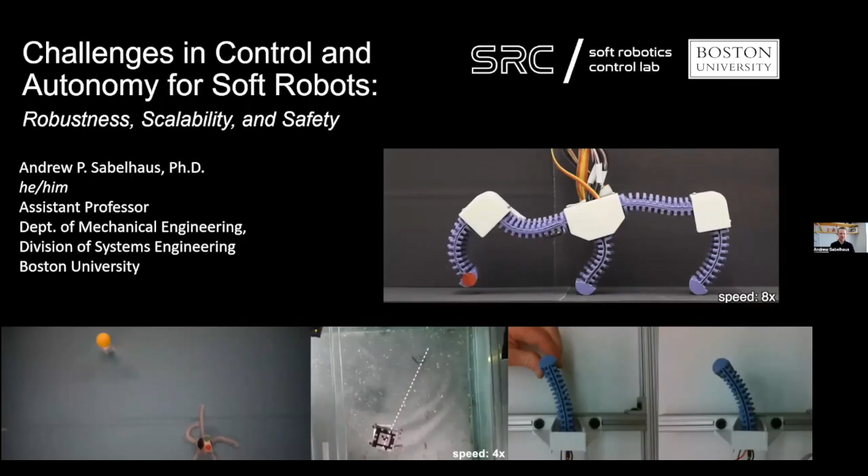Okay wonderful, so thank you all for having me today. I am really excited not just to be here as part of Embodied Intelligence 2023, but also to be in this particular session. I'm really excited to be, in a sense, among other folks who are thinking about control systems and autonomy. I'm a control systems engineer, sort of joining the soft robotics conversation here. What I'm hoping to bring to this today is a larger perspective on the question of what we would like to do when trying to integrate control and autonomy into soft robots. I'll bring three different possible directions here based on the work that I was doing as a postdoc and with my new group at Boston University, thinking about robustness, scalability, and safety.

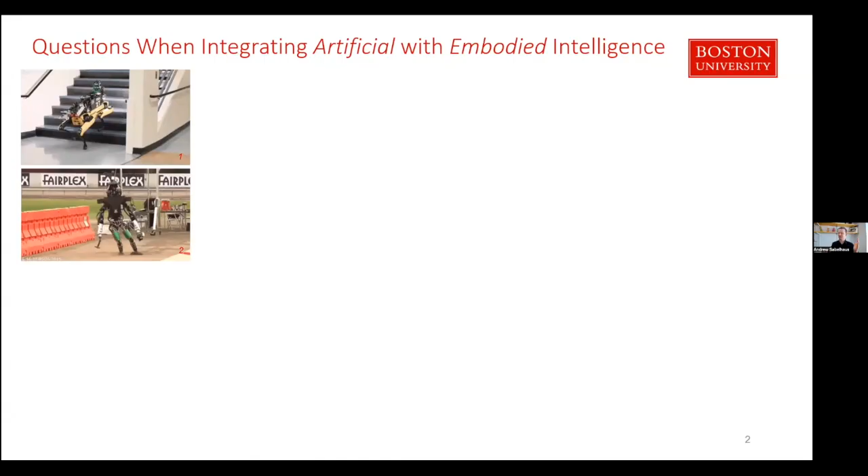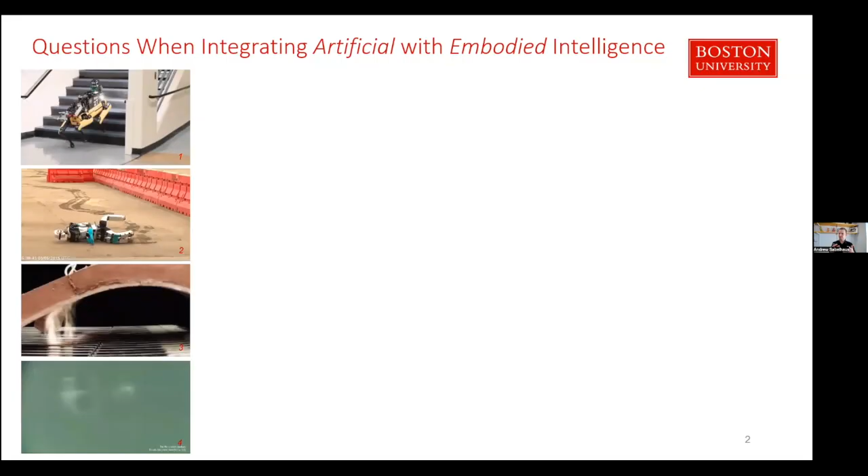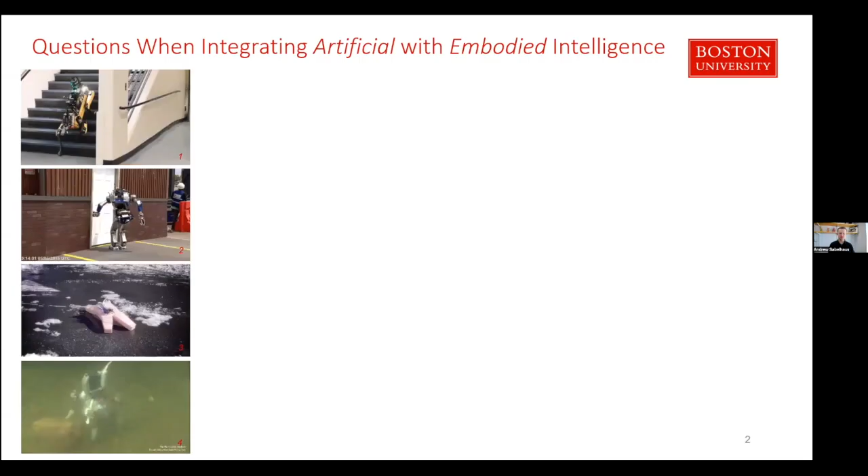So the higher level vision here is the conversation about integrating some amount of artificial intelligence with embodied intelligence. Please excuse the DARPA Robotics Challenge video. It's not here to illustrate the usual conversation about why we would need embodied intelligence, but more to contrast with oftentimes what we're looking at with the types of devices that we build that are softer, that have that sense of embodied intelligence. To illustrate this gap, right? Maybe why we would need to bring back in some of the artificial when we focused on the embodied. Oftentimes the motions of these devices, while very impressive with respect to the environmental interactions, are much simpler, right? You could imagine maybe if these rigid robots were successful, the types of motions they could perform are much richer. So there's a big gap here.

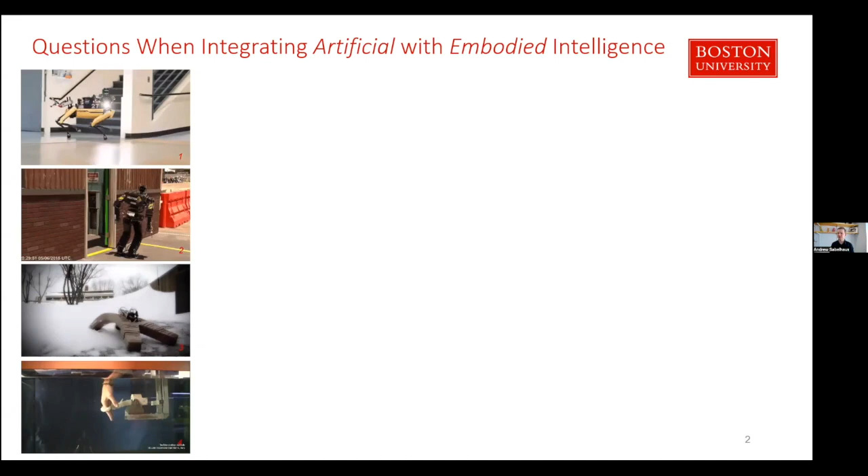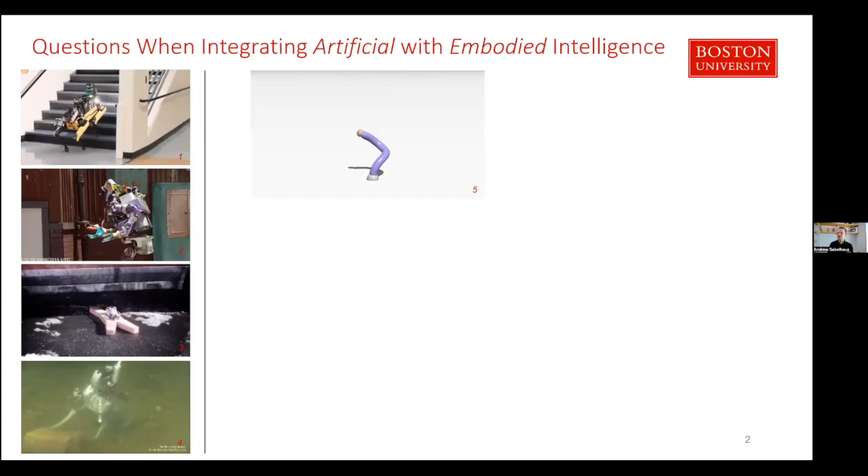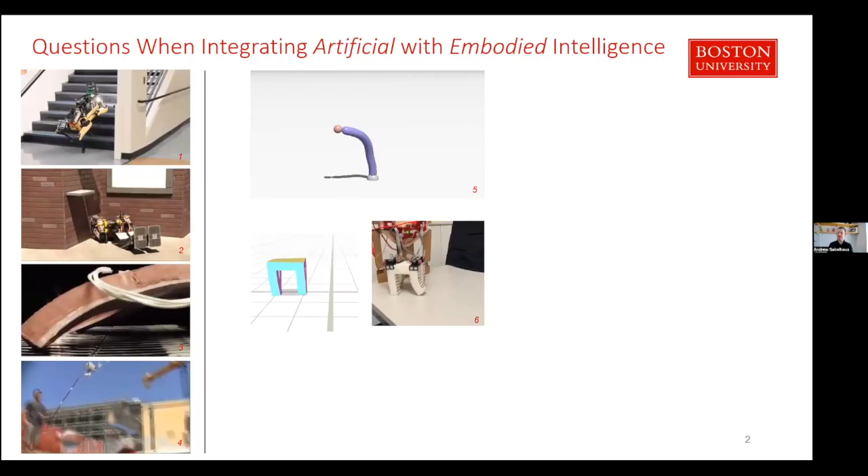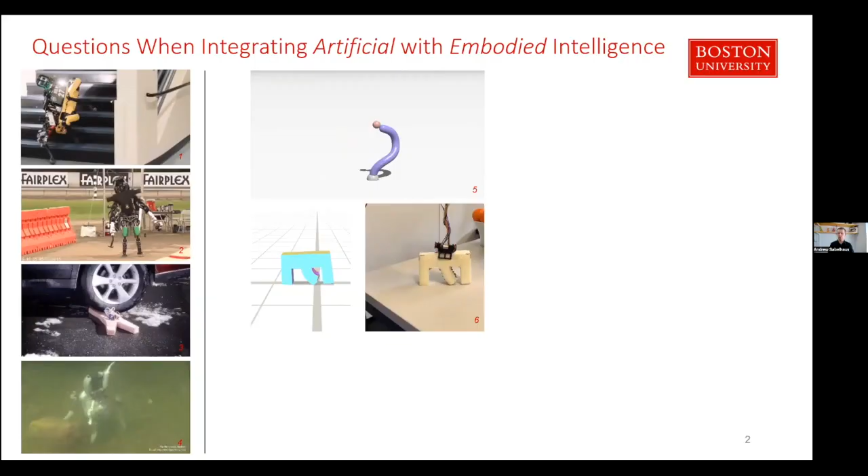And folks in recent years, very recent years, have been thinking a lot about how to bridge this gap, oftentimes applying traditional perspectives for traditional types of goals for what we might call controlling a soft robot, whether this is reinforcement learning or things like generating trajectories. We're thinking a lot about positioning of the robot's body in space. Oftentimes this comes with limitations with things like computation and implementing these in real time. So the results are either limited to simulation only, or pre-calculate a set of inputs, click go, and then let the embodied intelligence take over. So there's a question about whether or not that temporal separation of artificial and embodied is really going to be optimal for what we would need to bridge that earlier gap.

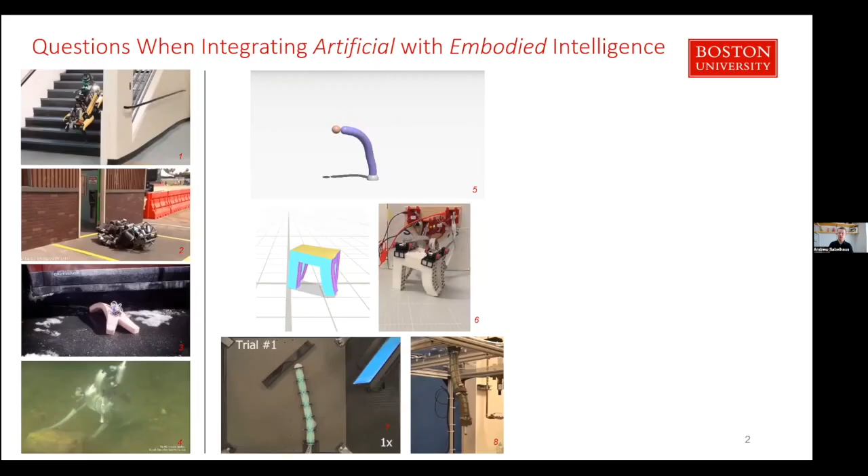And the times in which we have gone and been able to do real feedback, closed loop in real time for soft robot manipulators in particular, the environment has still been relatively simple, like well known, and matches our model pretty well, which raises the question of will that technique be transferable to the unstructured environments we're most interested in?

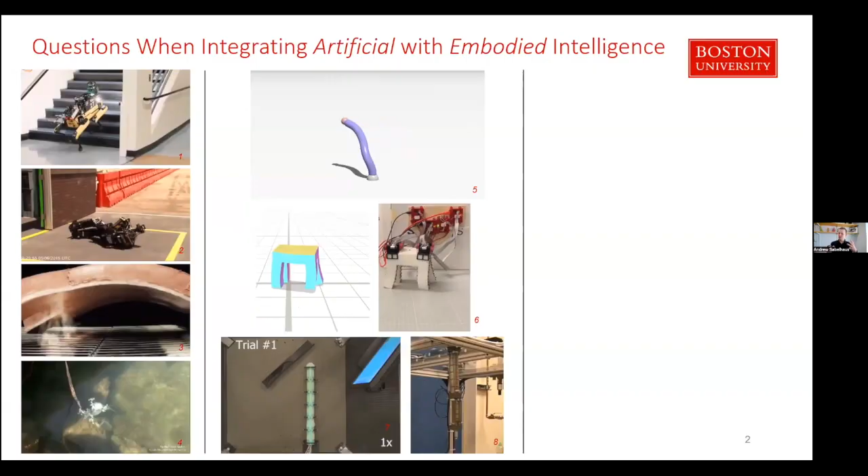And a big perspective here that I always like to think about with this conversation is a point that one of our colleagues made very eloquently just a few years back, in a mathematical sense: with a goal of good tracking performance, right, having a robot move into a particular pose, we end up reducing the compliance of the robot sort of by default. So there's a question of, if we were thinking about a traditional control goal, the tools that we have in our toolbox of having a system track a trajectory perfectly, the right solution in a sense is going to be something that's rigid.

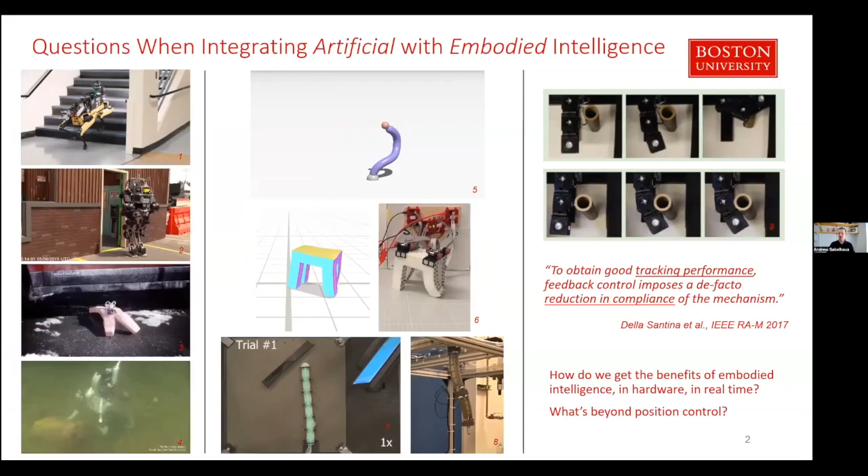So if we're talking about systems that are no longer rigid, is perfect tracking really going to be our goal? What does a control goal and a goal for autonomy look like that respects embodied intelligence, that brings it into hardware, that can happen in real time? And in particular, is there something beyond just positioning of a soft body in space?

I think there are three possible options as part of this larger conversation. I'm very interested in what you all are thinking about here too, especially other folks in control who are thinking about adapting our toolbox of techniques.

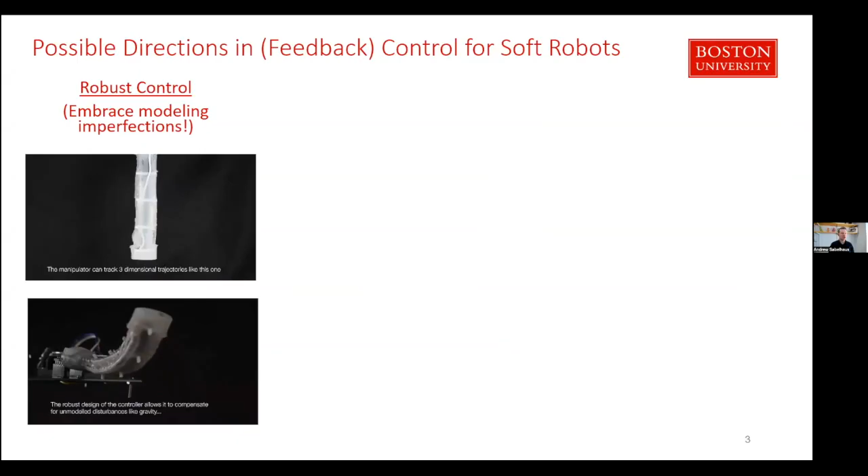So the first one is robustness. This is something that Professor Mitra made an excellent justification for earlier, where we could think about if our models are imperfect, if we're simplifying our models, can we instead design controllers that accept that those models are imperfect and still have properties like maybe stability, something we're comfortable talking about?

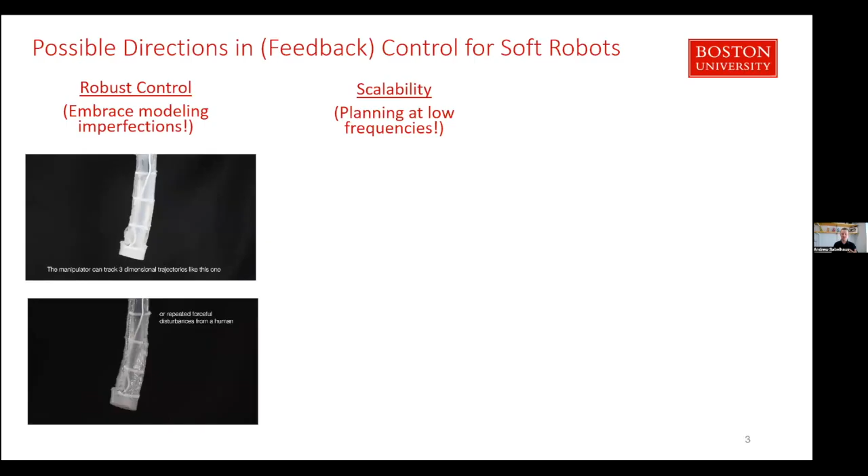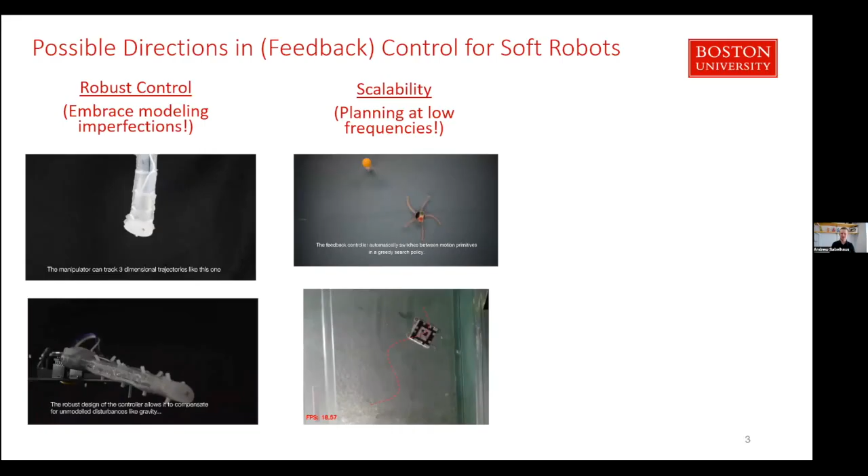Another one is to think about the scalability and real-time type of challenge. If we were to reframe our problem that we might call a control problem, instead as a larger question of autonomy, we might be able to justify this like planning, something at a larger time scale, lower frequencies, that lets the embodied intelligence take over for short periods, in a sense.

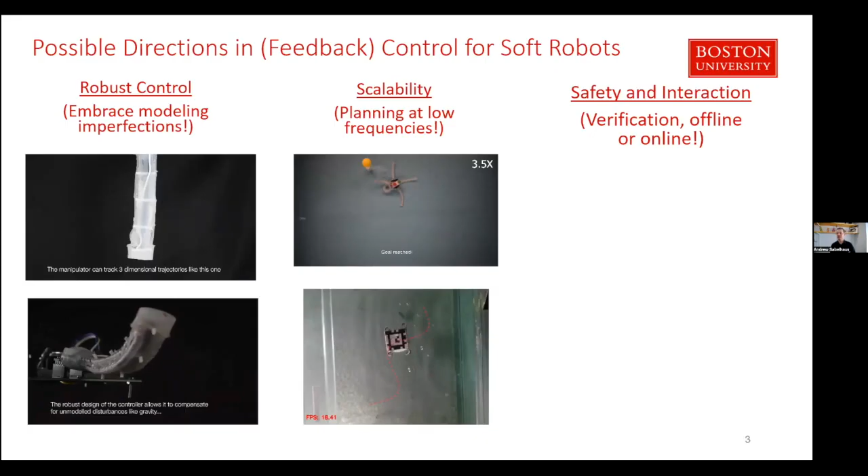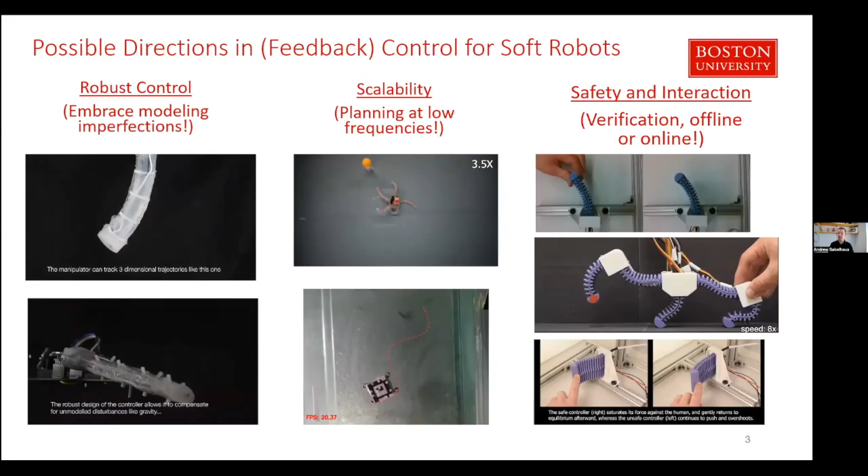And the last one, I think, that really gets at the heart of our argument for soft systems is thinking about safety and interactions. We have a strong set of tools in control systems and in robotics that let us talk about things like safety verification, and they haven't yet been brought into soft robots. I'm going to show some really initial work in my group towards doing that for our particular types of designs that use these shape memory alloy wires as actuators.

So this is a particular robot that I collaborated with back when I was at Carnegie Mellon with Zach Patterson, who's now a postdoc at MIT, where we had a shape memory alloy driven soft manipulator.

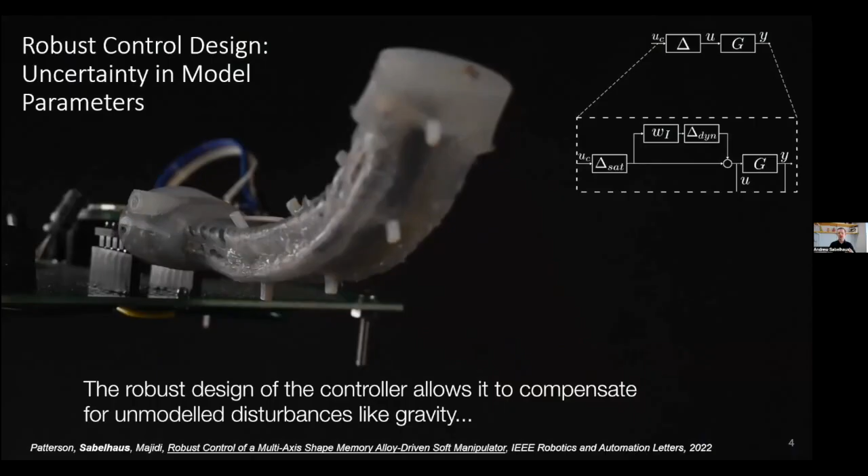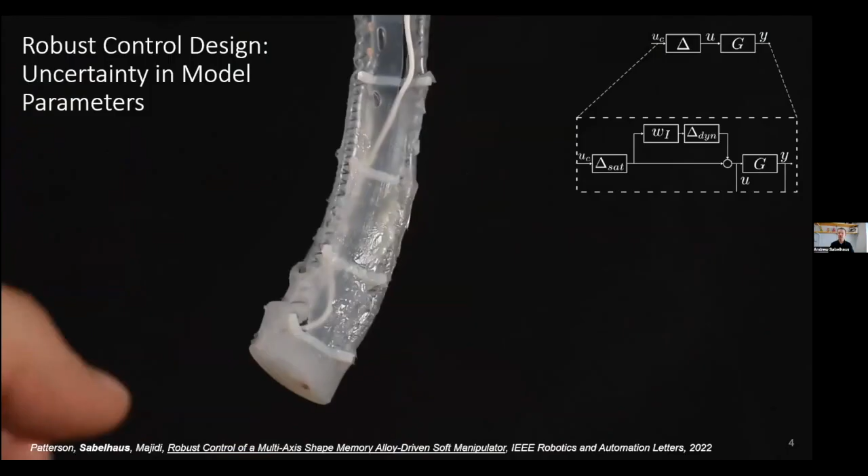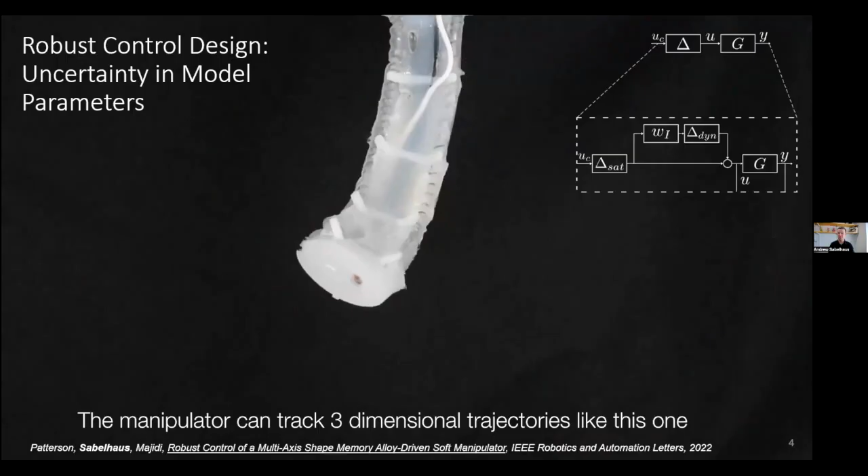Our approach with this was to think about robustness in the frequency domain sense rather than robustness in the state space sense here. Thinking about can we just express large amounts of the dynamics of the system as parametric uncertainties? And it turns out that this actually lets us do things like completely ignore gravity and put in a relatively arbitrary expression for damping and not worry about what the soft material is really doing, and still get pretty good performance out.

The other example here is thinking about planning. So if we have a robot that takes a relatively discrete set of actions in the first place, like this swimming frog-inspired robot that would push its legs in one direction, we could think about simulating a large number of options offline and then choosing between those actions. So instead, we've now discretized our problem by doing simulations beforehand.

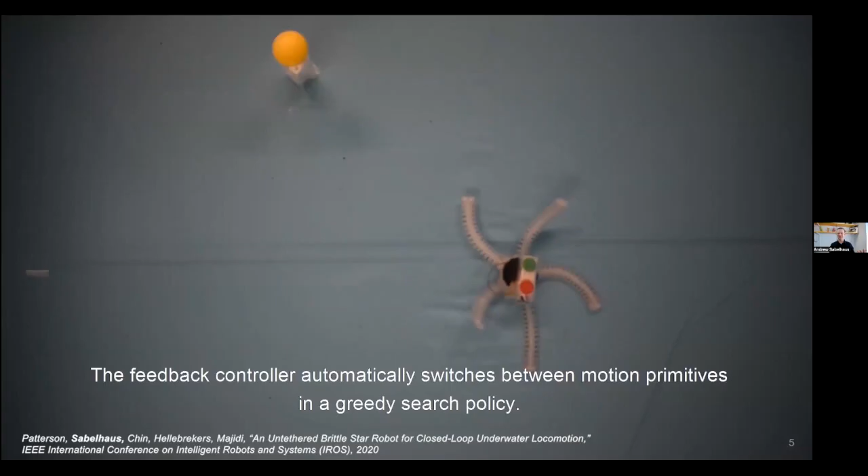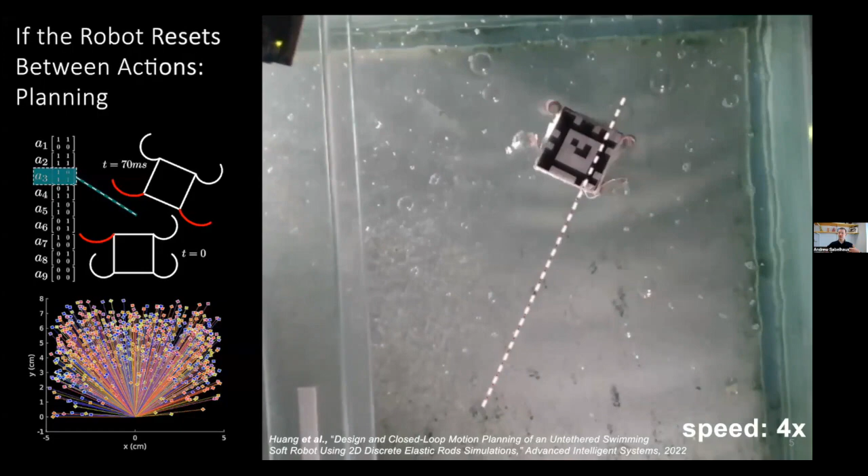An even simpler version is this underwater starfish robot that motivated the example with the robust control earlier, where it might even be the case that we could hand tune a set of these options and still get really impressive performance out. So thinking here about maybe putting the computation offline, generating a smaller set of options for online use.

Transitioning to thinking about that question about safety and verification. So here's an example of a planar limb that has shape memory alloy wires on either side. Like Professor Mitra had said, for these types of actuators, they are controlled by temperature. So we're passing electrical current through them and they heat up, they contract, et cetera. This is a test of a teach and repeat, a relatively representative traditional robotics problem.

So what we thought about for this particular issue was temperature safety for these shape memory alloy wires. It's actually a very common problem that other practitioners with thermal actuators will know and maybe, if not love, at least respect the challenge of these things overheating and either losing the material properties, losing the model consistency, or otherwise having a safety hazard.

So a very simple method might be in terms of generating these trajectories: we could think about offline optimization methods, now just with extra constraints in our optimization problem. We did this and we showed that at least in this open loop sense, we could ensure some type of condition. Now, that doesn't necessarily get us over the pre-calculate and click go problem, but it does lead a step towards the intuition that what we're talking about here might be more about constraint satisfaction rather than tracking behavior.

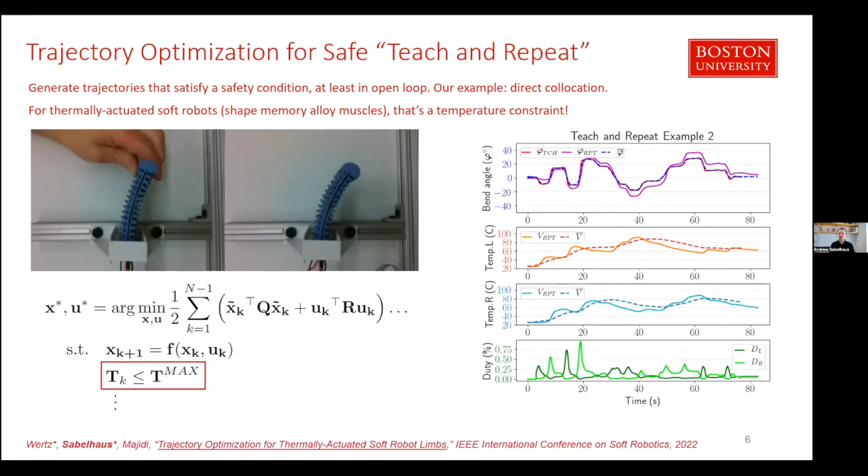And here's where this really ends up coming in terms of loop closure. So we implemented a really simple feedback controller for this particular limb and showed that we can overheat it actually very, very easily. We could command an infeasible state, we could put in a disturbance, that kind of thing.

And there's a tool called invariance that is highly used in things like legged robots. The principle here is that if we can, under the action of our autonomy, our controller, render some set invariant, where the robot never exits this set of states, we could call that safe. That's a very formal definition of this idea of safety.

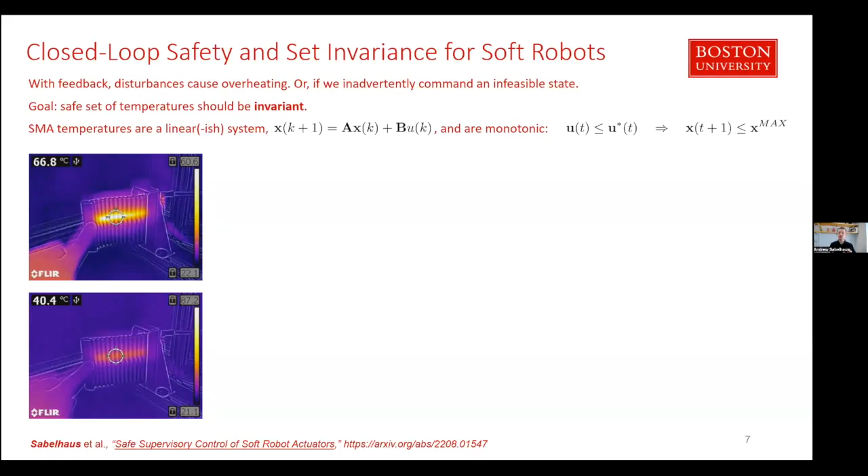Luckily enough, for our shape memory alloy wires, the temperature dynamics, at least, not necessarily the stress and strain, we could actually express them as a linear system and observe that they're monotonic. The intuition here is if you push more current through the wires, they heat up more. Less current means less temperature. And because linear systems have this very nice result for motion paths, motion planning from one position in space to another, we could go and say, what would be a maximum limit that would reach maybe our boundary, the boundary of our set that we're trying to render invariant?

And we went and attempted this out for a number of different of these shape memory alloy wires.

Oh, can you all hear me? Oh, I heard something. Is everything good? All good. Yeah, no, sorry, not sure what that was, Andrew. We'll watch out for it. Okay, no problem. Yeah, I just know these headphones are apt to cut out.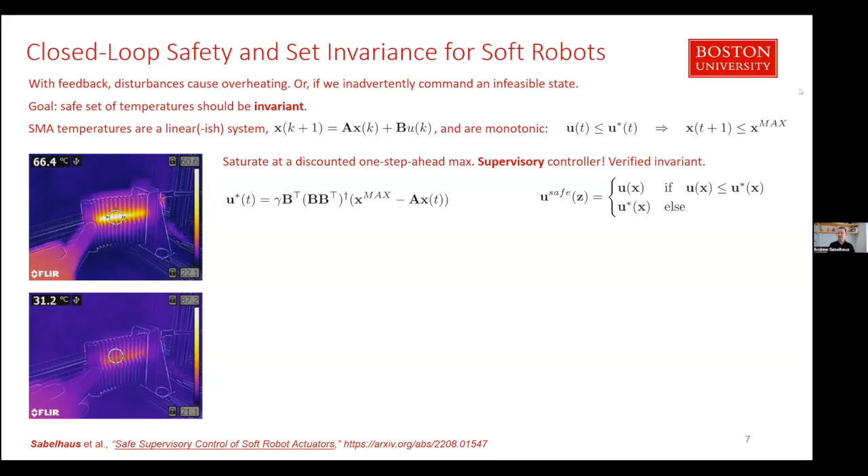So the purpose of this one is that a very simple way to talk about invariance might be saturation, or supervising the actions of another nominal control system.

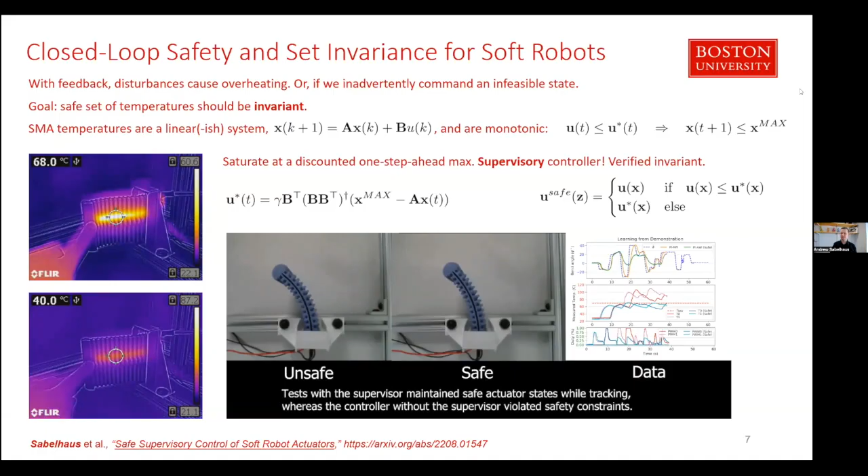The last little bit of what I've started here at Boston University with my group has been implementing these into practical robots. So this is a three-legged robot, still very much under review, trying to find its place out in the literature, but I think it shows a nice example of how we could think about doing safety in a piece of hardware.

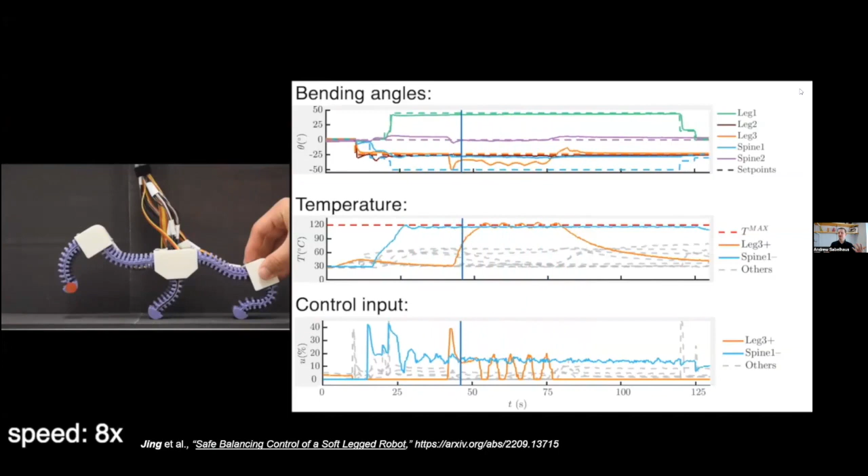So what we did was we took 5 of these individual limbs that move in 2 dimensions, connected them up just to have a simple example of what we might mean for something that's legged, and then went and performed a balancing action and had a really, really extreme disturbance come in, someone bending the robot in a way that the wires would have overheated. We showed that they don't. So a simple validation and verification here.

That's actually all I have for you all today. My hope is that this brings a little bit of lightness into our conversation for control engineers. The only last thing to say is that I am very much looking forward to collaborations on this. I know that all of these are really cutting edge topics, so please let me know if you're also interested in things like safety and verification from an artificial intelligence sense.